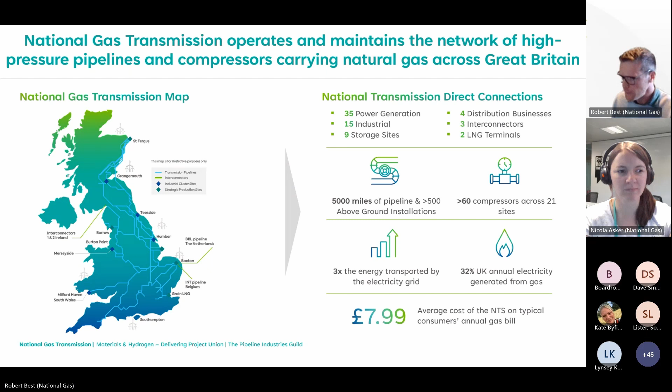So in terms of the transition to net zero by 2050, where do we sit in National Gas? We have what's known as a 3-molecule approach, those 3 molecules being methane - we think and we know that natural gas methane has a role to play, a big role in the coming decades out to 2050 in terms of delivering power to the UK. We're looking to decarbonise the natural gas via blending of natural gas with hydrogen, so a blended network. The intentions there is we have a network with methane, and over time we increase the blends of hydrogen in there, which can decarbonise.

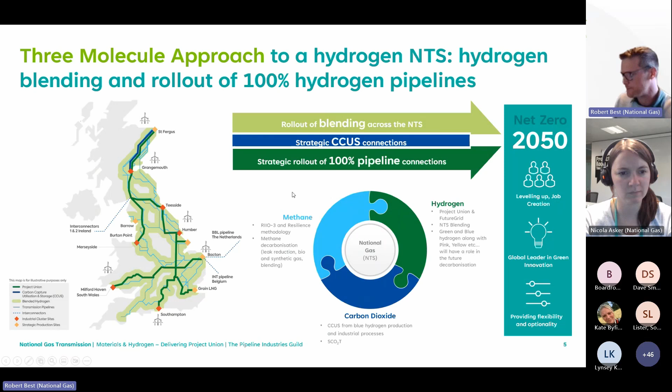This is a nice graphic that I wanted to put in that kind of shows again where we sit within National Gas and when it comes to the energy transition.

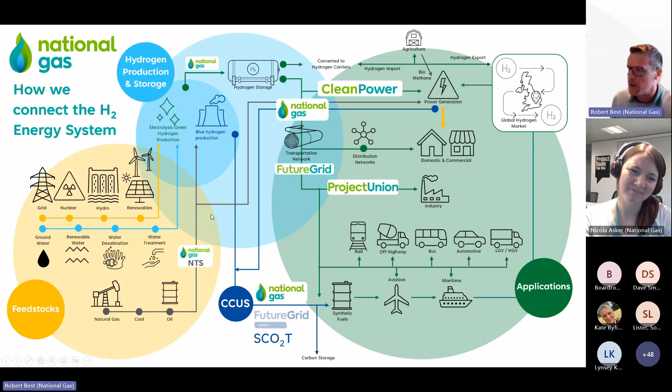So quite like that graphic kind of shows that National Gas, we fit in a number of these different ways.

So how are we going to deliver this?

So let's start talking about technical evidence. Loads of detail on this slide, but I really wanted to highlight the work that my colleagues do within the innovation team and the energy transition team in National Gas.

So we have projects listed here, and others not shown, related to areas that are really key for that energy transition. The safety case is paramount in our industry. We need a very good safety record in National Gas, and we need to make sure that is maintained with these new gases going forward. A lot of evidence at the moment is feeding into that safety case, making sure we understand how these gases operate and that we can do that safely.

Measurement is a key theme as well. Different gases behave differently, so things like gas analyzers and meters all need to be upgraded and changed potentially for different blends of gases going through that.

Compression - our network is all designed to compress natural gas. Hydrogen has different gas properties, so the compression side needs to be considered as well. If we're having a backbone, we need to be able to move gas around the country, so compression is a really important theme.

Operational themes - we've started some projects in the operational area, making sure our people on the ground know how to operate these networks. We potentially have 3 parallel networks with different gases in them. We need to make sure everyone has the right skills, competencies and training to operate and maintain those 3 networks.

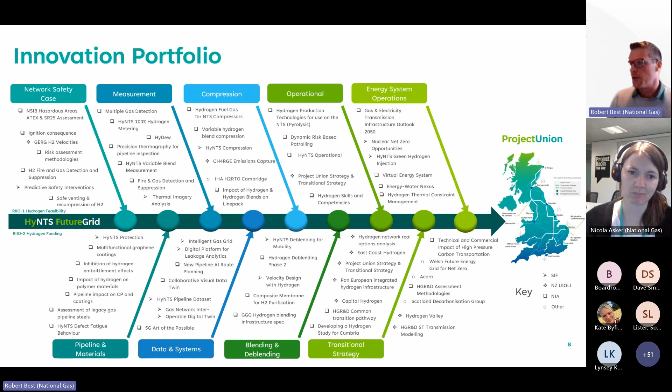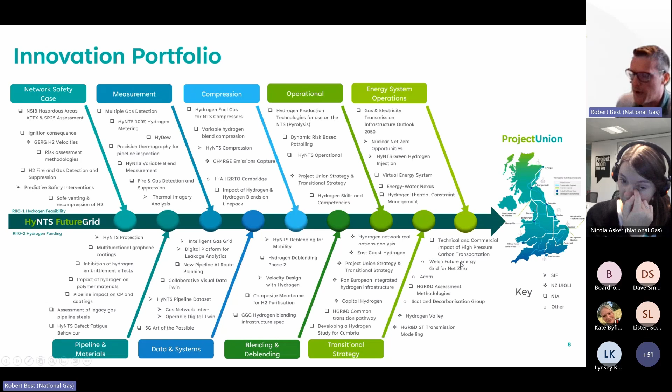And then the transitional strategy. It's all very well saying we're going to build up these 3 networks, but how are we going to do that, given there are a lot of people on our island, a lot of pipelines, and everyone currently needs the gas that goes through those pipelines. Developing that transitional strategy is really tricky and involves a lot of stakeholder engagement and work with our internal teams, to make sure that if we want to repurpose a pipeline, we're able to decommission it, but also meet our current requirements and demands.

So we've got a network that's relatively old. It's not the oldest - there are many in the United States and in Europe that are older - but it's getting on a bit, though it's a very well maintained and constructed network.

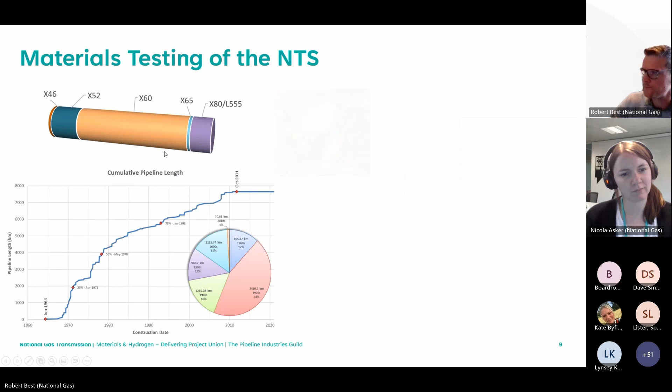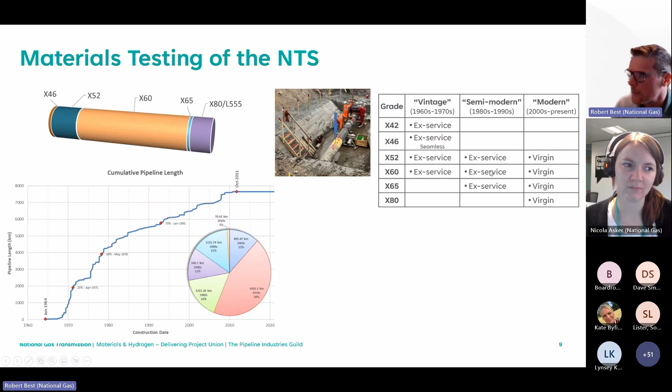So in terms of understanding the impact of hydrogen on these metals, what have we done? I initiated a project in which we got hold of pipes out of the ground that covered as many of the different grades and ages as we had across our network. I split them into vintage, semi-modern and modern - arbitrary distinctions - but we basically got hold of 11 pipes covering these grades and ages.

A lot of these were coming from decommissioning works or diversions, or things like HS2, for example - if there's any need to move the pipe for whatever reason, then I got access to those pipes. So that's quite helpful.

We took it out of the ground, then manufactured them into specimens. Here's a couple of fracture toughness type specimens.

We then put it in a chamber, filled that full of hydrogen - in this case 70 bar, 100% pure hydrogen - and then we do a number of tests, including fracture toughness and fatigue crack growth. These are two properties that we know hydrogen can impact in metals.

So the intention was taking 11 different pipes, testing the base metal. The welds are really important, so testing the seam welds that join the pipe together in the pipe mill, and the girth welds that join the individual pipe spools together, done in the field. We tested all three locations with these type specimens to get this data.

This fracture toughness data and fatigue crack growth rate data can be used in assessments of our pipelines to understand the capability of that pipeline to transmit hydrogen.

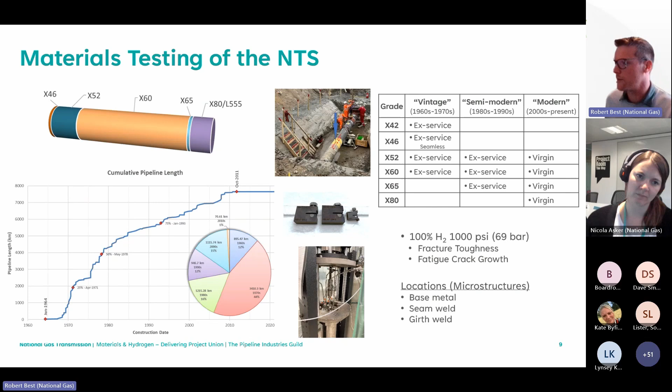Another key bit of evidence I wanted to talk about - and I'm sure most of you have seen this before - FutureGrid. There's been some really good comms over the last few months on this. We've just recently finished phase 1. I've only got a couple of slides on it, so if you're interested, reach out, look on the website - there's loads of really good information on this project.

This phase 1 has just completed, and the intention was basically to demonstrate the capability of our current assets in hydrogen and hydrogen blends.

This is a flow loop that was constructed of assets that have been decommissioned, again taken out of the ground. The vast majority of what we see there has previously seen some service within the national transmission system, and the idea was to bolt on and weld together as many different types of assets as we could.

So we've got filters, valves, pressure reduction skids, meters - everything we could get hold of and thought we could put into a loop was done. This was done up in Spadeadam with our colleagues at DNV, and with support from a number of other organisations.

In this flow loop, we flowed methane, then increasing blends of hydrogen to 5%, 20%, and then up to 100% hydrogen. The intention of phase 1 FutureGrid was to demonstrate that we can put hydrogen into our network and all these assets operate as expected.

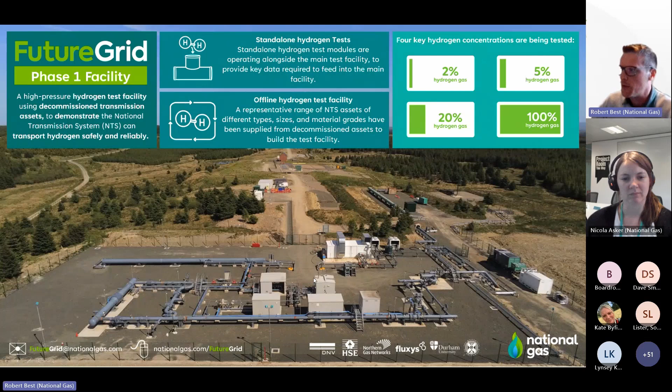So lots of work to understand things like vibration and noise, and whether there's any changes, and whether they match the models we've currently got for hydrogen. A successful project on FutureGrid, but loads of data and information - check out the website.

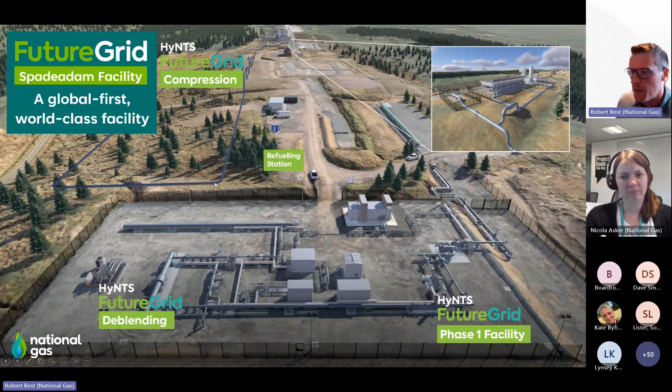That was phase 1, completed earlier this year. We're well into phase 2, which has two sections: FutureGrid compression and FutureGrid deblending. You can see this is the phase 1 loop and the compression. We're looking to go all the way down the side of this same site in Cumbria, in northwest England, and the deblending facility is going to be a bolt-on to the phase 1 loop.

So what is the FutureGrid compression project looking to do? This is quite an ambitious project. We're going to be building a kilometre-long loop of above ground and below ground pipework, again decommissioned as much as possible pipework that's come from our network, previously seen natural gas service. We're going to take a decommissioned compressor and bring it up to Spadeadam, then incorporate it into the loop.

The key thing about this project is we're looking to operate that compressor with blends of hydrogen and understand what modifications, if any, we need to make, and up to what level of blend these current compressor systems can operate, then understand what modifications will be required to enable 100% hydrogen to be compressed within these current facilities.

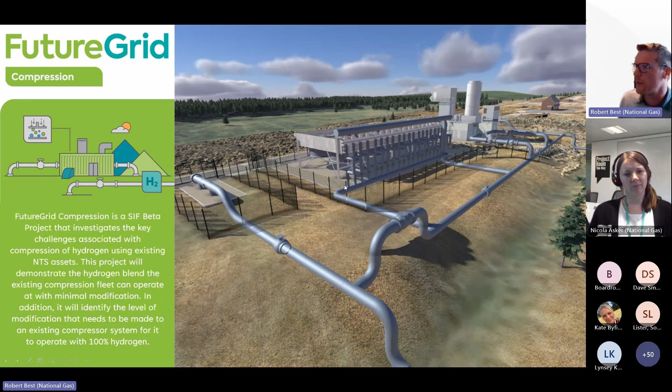So this is all about making sure we get the best value for money for the consumer here. We're using assets that currently exist rather than having to replace them with completely new pieces of kit. What does that involve in terms of refurbishment and upgrades to these current pieces of equipment?

The other project is FutureGrid deblending. As I said, this tags on to the FutureGrid phase 1 loop, and this is really looking at a potential future market focused on transport, and looking at how we can deliver hydrogen at the required purity levels for different customers.

So if you think about hydrogen going into fuel cells, the purity and grade needs to be very high. For other sort of internal combustion engines or other industrial users, maybe a less pure blend is required.

So this project's really about understanding the technical side, what technologies are available, and demonstrating that they're capable of deblending hydrogen from a natural gas blend.

But also there's a lot of work with stakeholders and the market side, understanding the requirements of these different industries. We have a network that, along with the distribution companies, covers the whole of the UK, and people need transport across the whole of the UK as well, so we think it's quite a good match. But obviously this project's looking at the economics, as well as the technical feasibility of this as a technology.

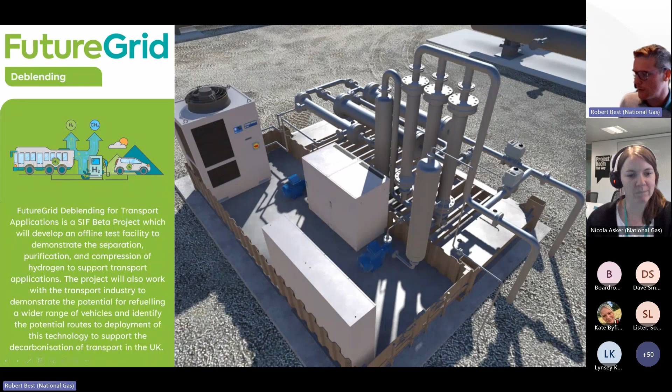So there are a number of regulations, gas safety management and pressure safety regulations, that need to be updated to enable this within our network. Currently we're licensed to transmit natural gas, so to do anything different we need updates to these, and this work is helping support those updates.

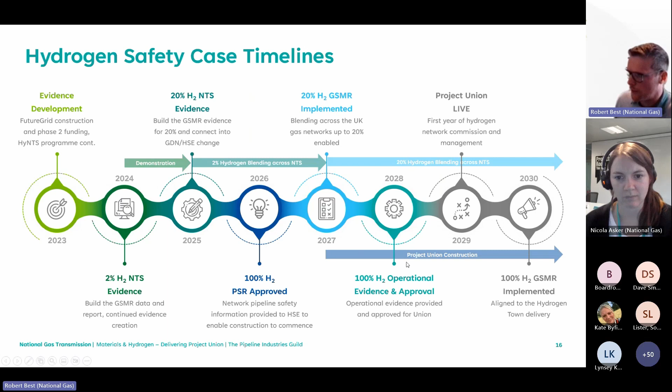These updates to the regulations will then enable blending to occur sometime this decade, and by the end of the decade we're looking to start construction of Project Union, the 100% hydrogen backbone, as I said. So we need to make sure we have all the evidence case developed to be in the right place to do that. Project Union's construction will go through into the 2030s, with the first section planned by the end of this decade.

So that's the development of the safety case. Once we've done that, this has kind of all been relatively generic and general up to this point, looking at typical materials and typical assets we have, also looking at specific types of assets, but not necessarily saying this pipeline is capable.

So the next section is, once we've understood how we do this, we then do our pipeline specific assessments and risk assessments. So we're now at a stage where we'll select a pipeline. We want to repurpose this for hydrogen, and again, the same thing would happen for CO2.

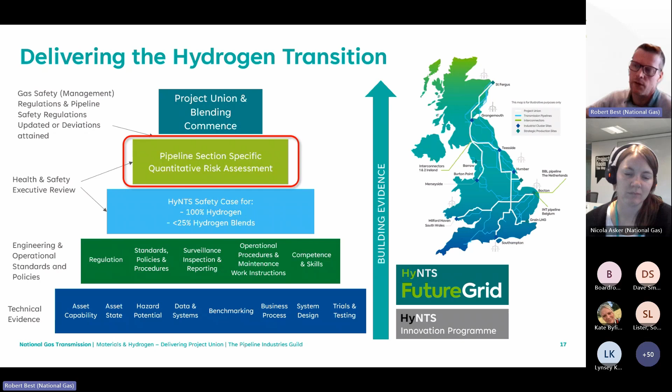So from a pipeline perspective, how would we do this? Well, we'd look at the hydrogen design codes that currently exist. Many of you, anyone who's been working in hydrogen, will have heard of ASME B31.12. This is probably the most extensive and well-known hydrogen code, obviously with a North American bias, but it's kind of an international standard really. And from that, pretty much all the standards around the world have been based really.

So that includes our IGEM TD1 standard. TD1 covers natural gas, but there's a supplement that covers hydrogen, and it's TD13 for pressure regulating installations, again, which has a supplement 1 for hydrogen. And these two supplements basically have copied very heavily from ASME B31.12 with a few tweaks that are more representative of the way we do things in the UK.

So when it comes to repurposing, both these codes have sections that give some high-level guidance on how we do that. You can see here sort of viability design assessments, then into the detailed technical assessments. It doesn't really give you much specifics on how to do that, so we've been developing our own process within National Gas so that we have more clarity and detail in terms of how we do that, and obviously making sure that it's tailored for our network, which, as I said previously, is maybe more modern than some networks around the world.

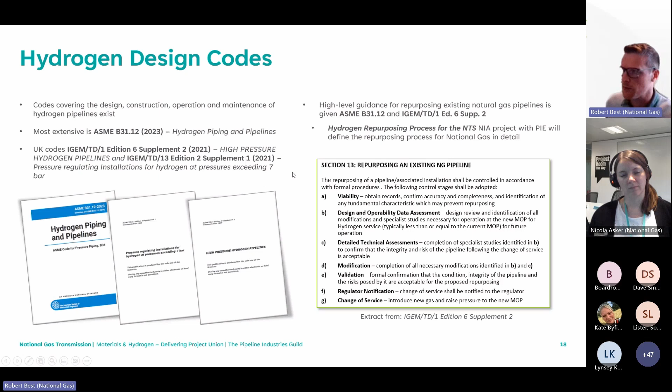So how are we going to do that? There's four main stages. The first one is a viability assessment, so looking at the capacity of a pipeline.

As I said, we're at a stage where we've chosen a pipeline, or we want to get hydrogen from A to B, and we've got a number of options there. So we can do a capacity assessment, making sure that the pipeline's big enough to transmit the amount of energy we need - a simple kind of hydraulic assessment on that. Material assessment as well. We know that hydrogen has an impact on materials, especially metallic materials, so we can do a quick high-level assessment to make sure there's nothing there that would cause us to not want to repurpose that line.

Currently within our network there aren't any particularly high-risk materials that we've identified at present, but there are maybe materials that we need to understand the performance of in hydrogen and design appropriately.

The next stage is conceptual design and operability studies. So this is a more detailed design review, more detailed capacity analysis, making sure that the pipeline is capable. This is where we'd look at possibly doing things like material grouping.

So we're doing some assessments on the pipeline from a materials perspective, and maybe we can use data we've generated in other projects, the one I mentioned, in order to get an indication of the performance of the pipeline in question.

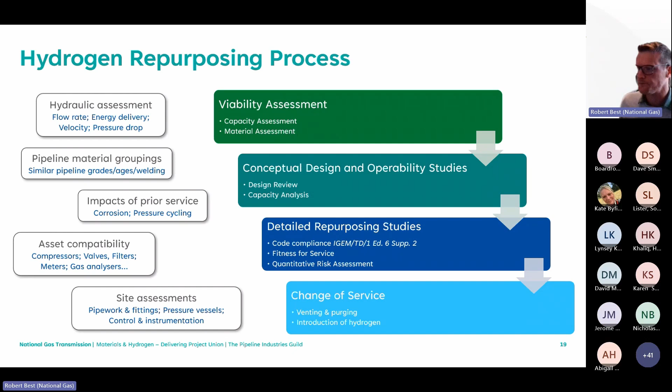So, to summarize: National Gas Transmission is the high pressure gas transmission system operator for Great Britain. Within the context of the net zero transition, we have a three-molecule approach: our 100% hydrogen backbone, which is Project Union, our blended hydrogen natural gas network, and our carbon dioxide network, known as Connect.

We've done an extensive test program with partners from around the world to generate evidence. We've led a number of projects ourselves, but we've also been partners on numerous other projects around the world. Lots of people are doing the same thing in the United States and Europe, and we've been working closely with those colleagues to share evidence and learnings and come to the best conclusions.

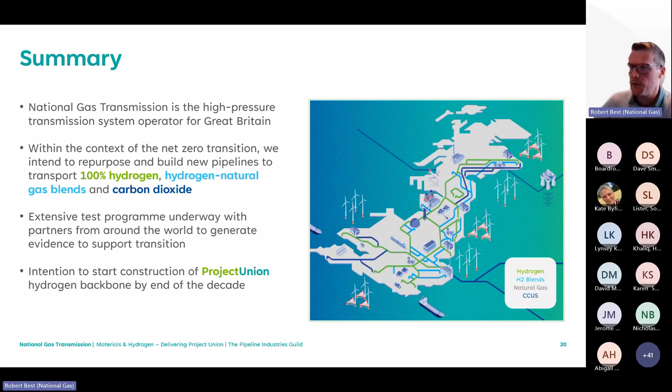Finally, on Project Union, our intention is to start construction of that hydrogen backbone by the end of the decade. And that concludes my talk. Thanks everyone for your attention. Hope that was interesting. Not quite sure how we're going to do questions - we can't see the chat, but I think Nicola and Kate will be able to organise that together.